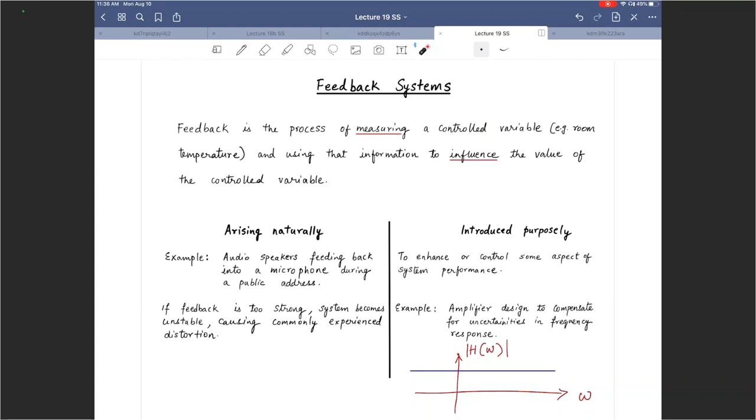Ideally you would want this to be flat, because you would want all frequencies to be amplified by the same gain. But if you do not have such a situation happening for some real amplifier, then you can use feedback to correct for those certain uncertainties.

For example, if instead of flat, it was doing something like this, you could use feedback to fix that - find out what frequencies are getting distorted and then adjust the gain, adjust the strength of those frequencies using that feedback information to bring it back up.

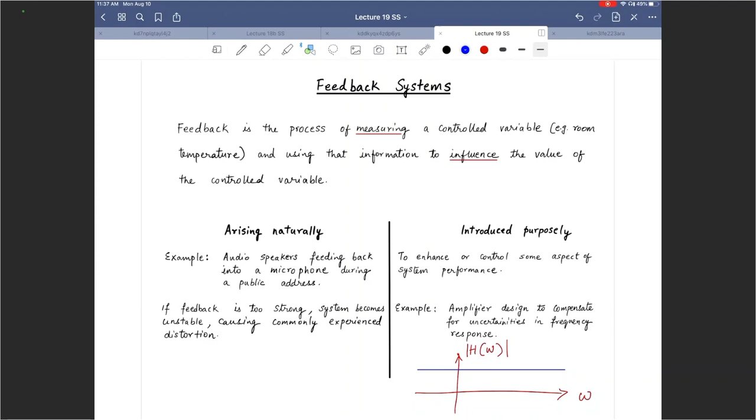We will take a look at that in just a bit, but I'm going to leave this as flat so that we see what I meant with that example - flat frequency response for the amplifier. That's what is desired in most applications of amplifiers.

Now, a little bit more discussion about feedback. Feedback is also commonly used in stabilizing unstable systems. So if a system is unstable, you can use feedback to get it closer to stable behavior.

An example is controlling the flight of a drone - if it is an unstable drone, you can use sensors to measure and influence the controlled variable. We are going to analyze one such system: an inverted pendulum that I'm very excited about.

The basic tool that we are going to use to analyze linear feedback systems is the Laplace transform for continuous time systems, and we use the Z transform for discrete time systems. So today what we are going to be doing is analyzing linear feedback systems using Laplace transform, and we'll be focusing on the inverted pendulum example.

For stability, the condition for continuous time systems is that all the system poles should be in the left half of the S-plane. If all the poles of your system are in the left half of the S-plane, then the system is stable. If any one of the poles is on the right half, it is going to be an unstable system. Even if they are on the imaginary axis, things are going to be a little bit risky. So the system is marginally stable if the poles are non-repeated complex conjugates on the imaginary axis. If they are repeated poles on the imaginary axis, that is unstable.

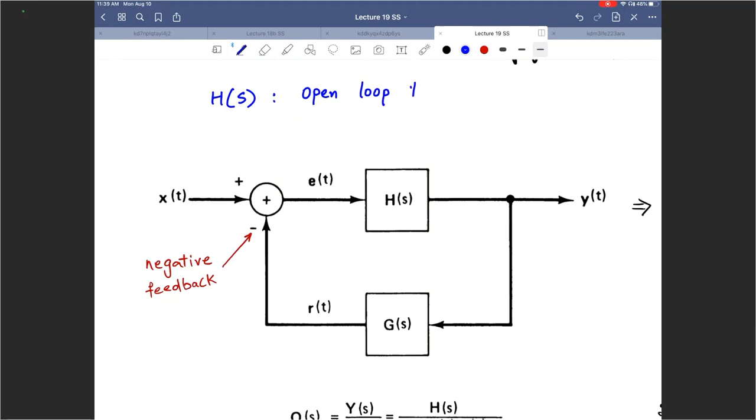Let's move on. How do you analyze a system? For example, we are going to start off with a feedback system like the one shown, with an input x of t coming in, going through h of s, the transfer function of the forward path. I'm going to call h of s my open loop transfer function, because if there was no feedback, it would be open loop, there's no closed loop. If I remove g of s, I have only this going straight through, so y of s divided by x of s would be h of s. That's your open loop transfer function, when there is no feedback.

However, if there is feedback, we call this feedback transfer function g of s. We measure y, feed it back through g of s as a negative feedback, or it could be positive - right now we are considering negative feedback. And then we subtract r of t from x of t to get e of t. And that goes again through h of s. So how do you analyze this system?

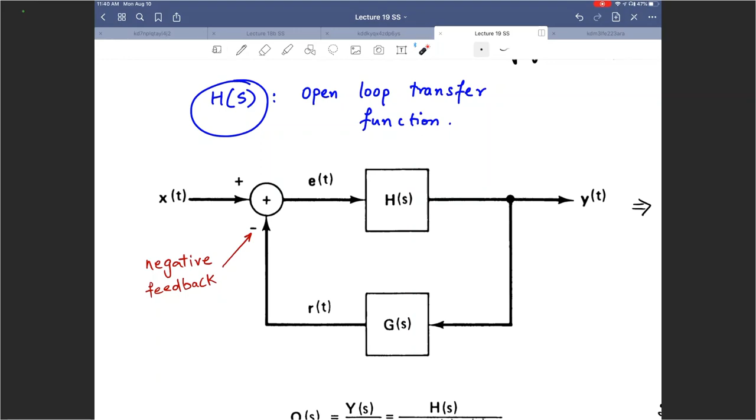First off, I'm going to write E as x minus r. This summer over here has negative feedback from r of t, so E, the error, can be written as x minus r. Take Laplace transform on both sides, you get E of s equals x of s minus r of s. That's equation number 1.

Next, we know that E is the input, goes through the transfer function h, you get y at the output, which means by just observing those three things, I can write output y of s equals E of s multiplied by h of s. In time, it would be a convolution between E of t and h of t; in Laplace, it would be a multiplication. So y of s equals E of s multiplied by h of s. That gives you equation 2.

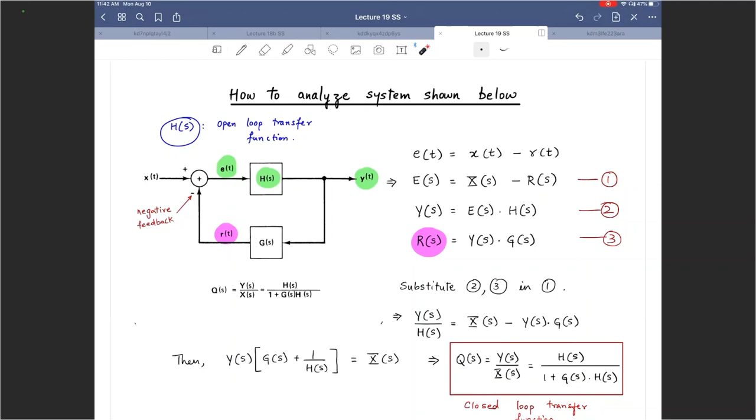Then R of s, the Laplace transform of r of t, can be written as the Laplace transform of y of t multiplied by g of s. Now we have got those three equations.

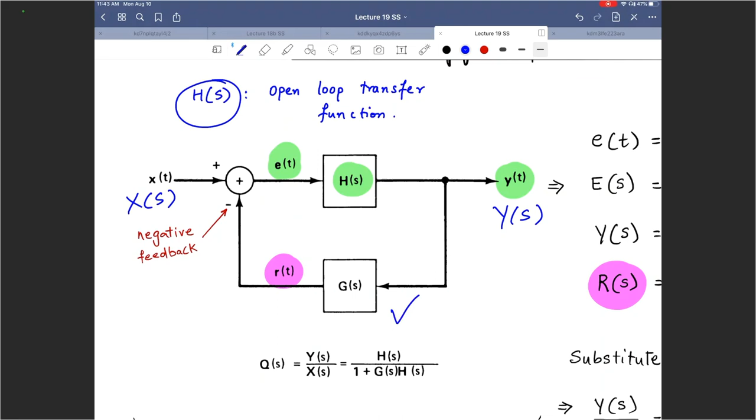From these three equations, we are going to substitute 2 and 3 in equation 1, and we are going to write y of s divided by h of s as x of s minus y of s multiplied by g of s. This is by simply manipulating the three equations. Now, if we rewrite this, what we are after is the closed loop transfer function, y of s divided by x of s with g of s present. It would come out to be: the closed loop transfer function q of s equals y of s divided by x of s, as h divided by 1 plus g times h.

H of s is the open loop transfer function, also called the system dynamics. G of s is the feedback dynamics. So this is system dynamics, and these are feedback dynamics.

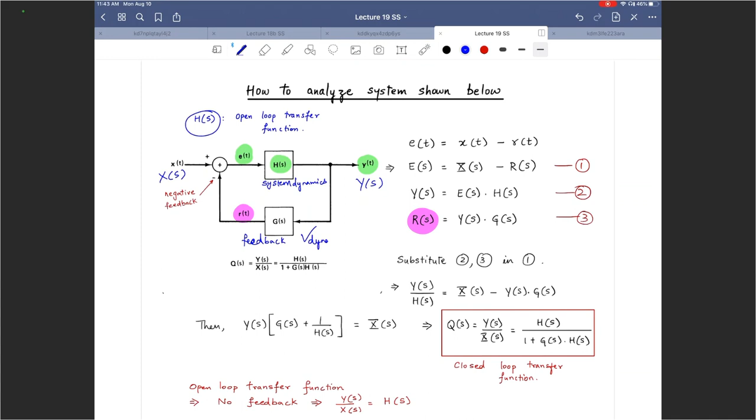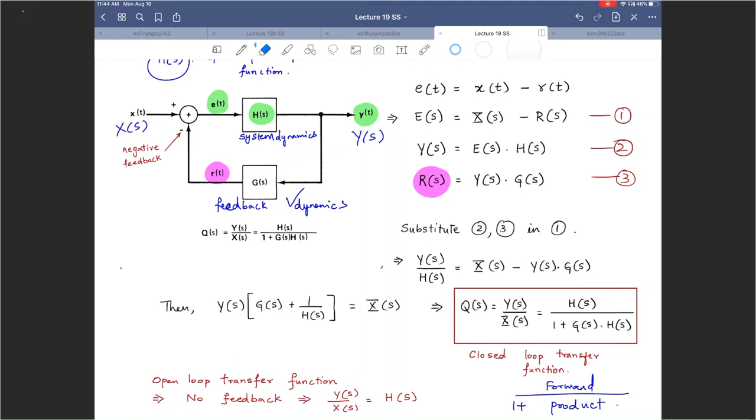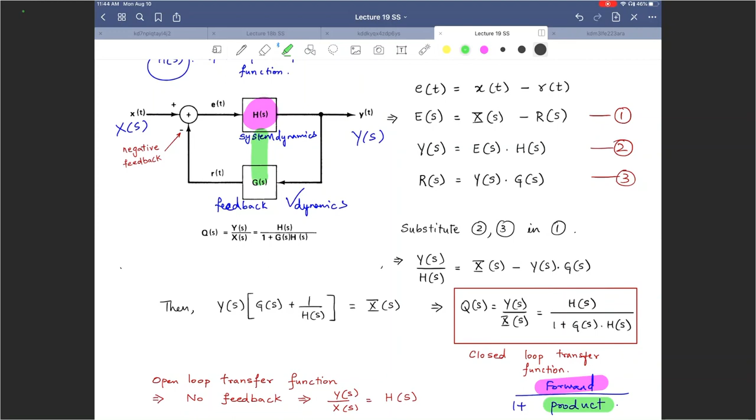There is a very easy way to figure this out. The trick is to think of this as forward divided by 1 plus product. I remember it this way - forward, you see this? Let me erase these. So forward divided by 1 plus product, where product is multiplication of these two. That's your closed loop transfer function.

Next, what is the open loop transfer function? It is simply h of s, which is y of s divided by x of s. So h of s is called the open loop transfer function, which is y divided by x when g of s is 0, when there is no feedback, when the loop is not closed, it is open - that means no feedback. So open loop transfer function is h, closed loop transfer function is h divided by 1 plus gh for this particular system. Questions here?

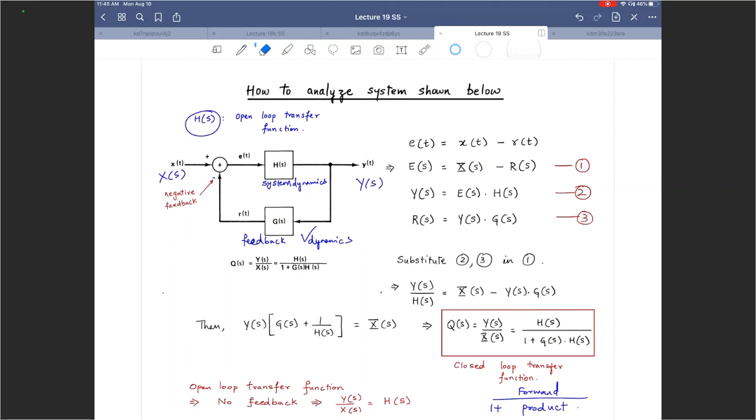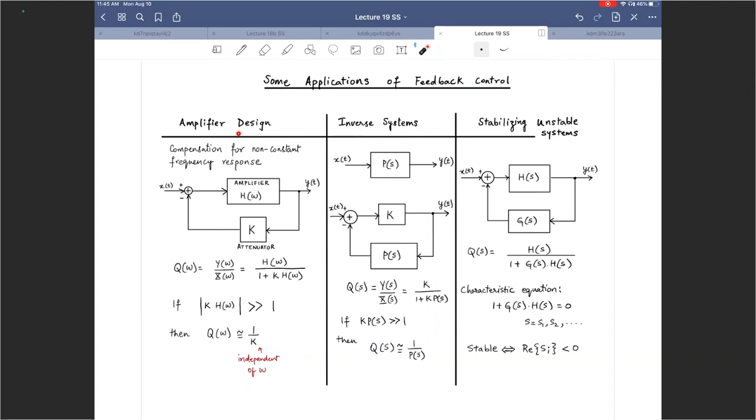Okay, now some applications of feedback control. I talked about amplifier design, how we wanted the frequency response of an amplifier to be independent of frequency, a flat frequency response, right? We can use feedback to get that done. How? Let's take a look.

Compensation for non-constant frequency response. If x of t is the input, y of t is the output, we have an amplifier with frequency response h of omega. I can use feedback through an attenuator of some attenuation constant k, provide that as a negative feedback, and the claim is that this will make the amplifier gain independent of frequency. Let us see that.

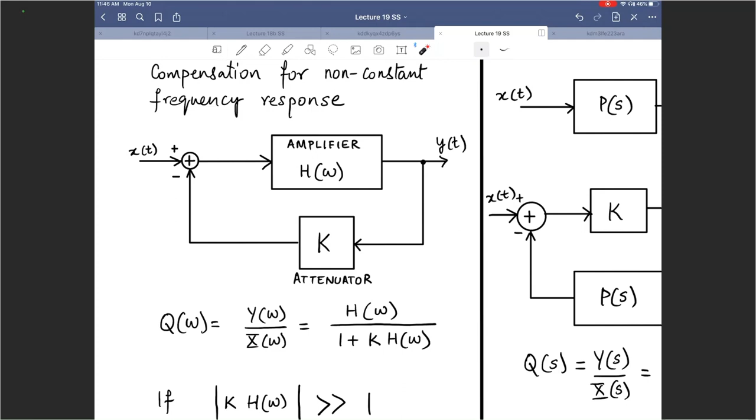Q, the closed loop transfer function of this amplifier, is going to be y of omega divided by x of omega, or forward divided by 1 plus product. Forward is h of omega, divided by 1 plus product, which is k times h of omega.

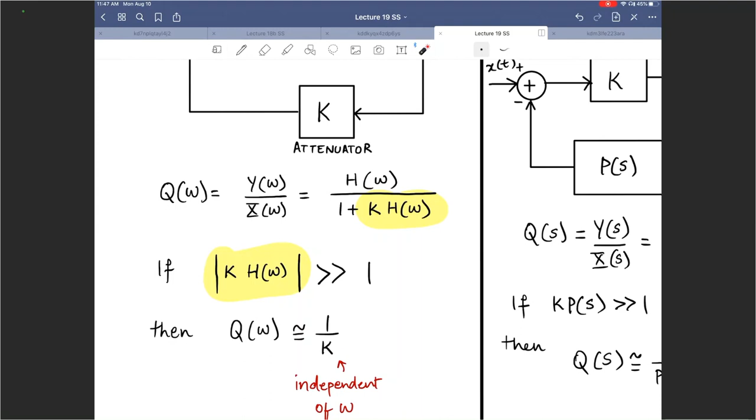Now, if I choose k times h of omega, this guy right here, to dominate, much greater than 1, then what would happen is Q will become simply 1 divided by k. Because if this dominates, I can ignore the 1, h of omega gets cancelled out and you get 1 over k. 1 over k is independent of omega, which means my closed loop transfer function became independent of frequency, which means it became flat, because k is a constant, that's the amount of attenuation. So that's how you can use negative feedback to get a constant frequency response for an amplifier.

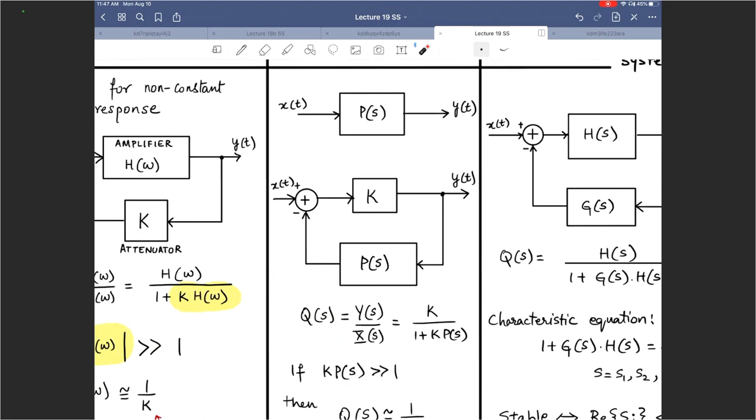Second application here is for an inverse system, which means, can I use feedback to get the response of 1 over whatever the system response is? So for example, if you start off with the original system, which is x going into p of s, you get output y of t. Can you design a system that does the inverse of this, 1 divided by p?

We can do that by connecting a negative feedback through p of s in this particular configuration: x of t, negative feedback, you have a constant multiplier k, that's your y of t. You're taking y of t and feeding it back through p of s to get that negative feedback amount. For this, what would be the closed loop transfer function? It would be forward k divided by 1 plus product, 1 plus k times p of s.

And if I choose k times p of s to be the dominant factor in the denominator, that means k times p of s is much greater than 1. In that case, k would get cancelled out and you would get approximately Q of s is 1 over p of s. That is how you would design an inverse system.

Now the last column here is actually what we are really trying to understand. Can I use negative feedback to stabilize an unstable system? Some of these things are in time, some of these things are in s, so some of them are in the Laplace domain. You have h of s, the transfer function of the open loop transfer function, g of s is the feedback dynamics, and we earlier derived that the closed loop transfer function Q of s is h divided by 1 plus g times h. So for the closed loop transfer function, what is the characteristic equation?

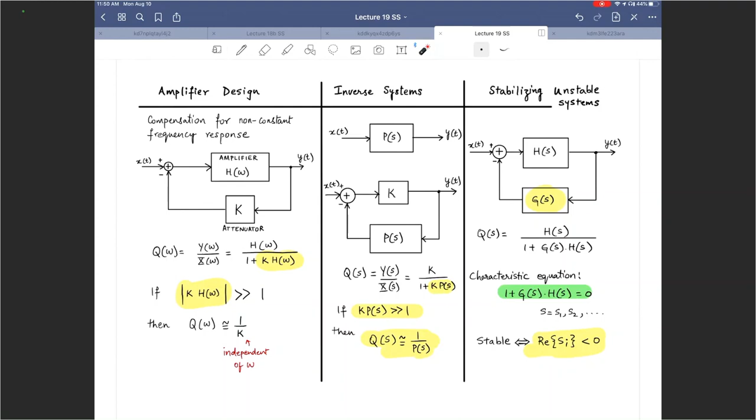And this leads us to our real world example that I want to focus on: the inverted pendulum. Now, while we are talking about the inverted pendulum, I hope that you guys are trying to balance a pen or a pencil on the palm of your hand. When you try to balance a pencil or a pen on the palm of your hand, what is going to happen? Well, of course, if you don't do anything, if you just place it vertically, it would topple over, right? So that means that to begin with, this system of the inverted pendulum is going to be unstable.

So what do you need to do in order to balance that pencil on the palm of your hand? Well, you would have to move the hand itself, right? So in real time, you would have to measure how the pencil or pen is toppling over, and you would have to move your hand in such a way that you do not let that inverted pendulum topple over.

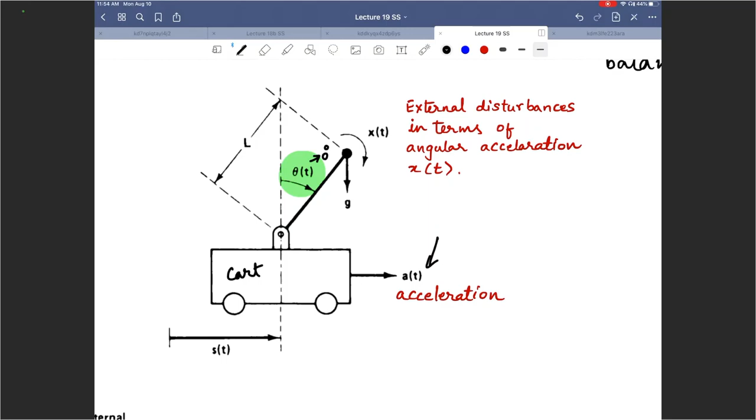Now by itself, the inverted pendulum is going to be unstable, clearly, right? So if we are not moving the cart, and if we just leave the inverted pendulum upright, it is going to topple over. Even the slightest bit of movement will topple it over. A lot of things have to be perfect in order for it to continue staying upright. Not practical, not stable by any means.

So we can apply an external acceleration a of t to keep it balanced. So the goal is going to be this: even if you have external disturbances, somebody pushing it over, some wind, or something or the other that makes it topple over, we are going to measure theta of t. That is our measurement of the control variable, and then we are going to use that measurement value to change the acceleration of the cart such that theta of t goes to 0. That's going to be our goal.

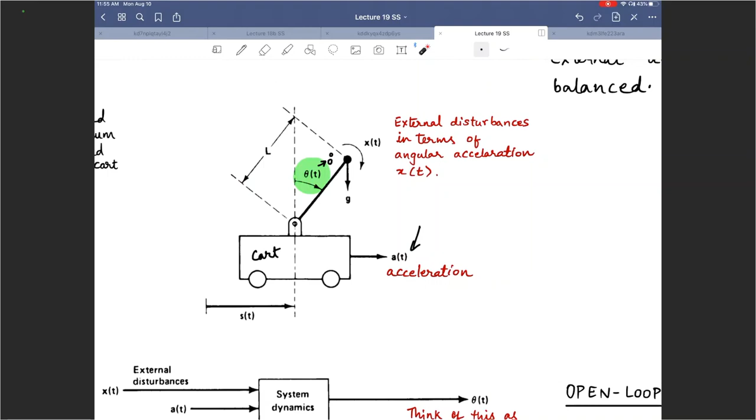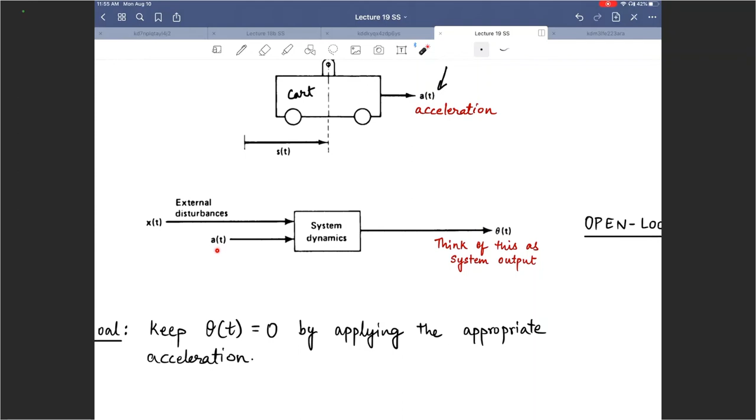So having talked about that, let's take a look at these two things here. Our x of t is the external disturbance. This is somebody pushing on top of the pendulum to make it topple over. A of t is the acceleration of the cart.

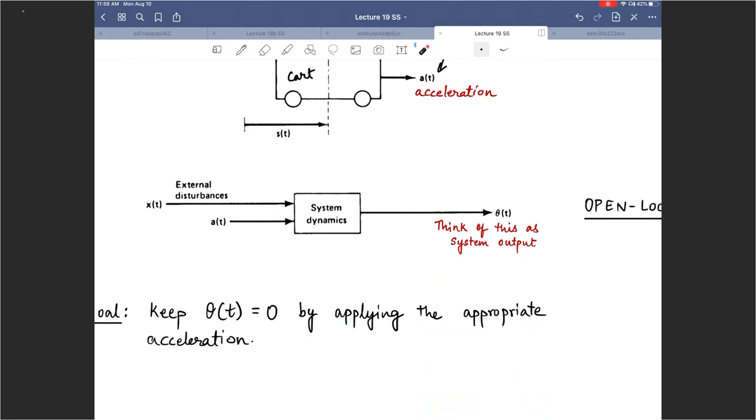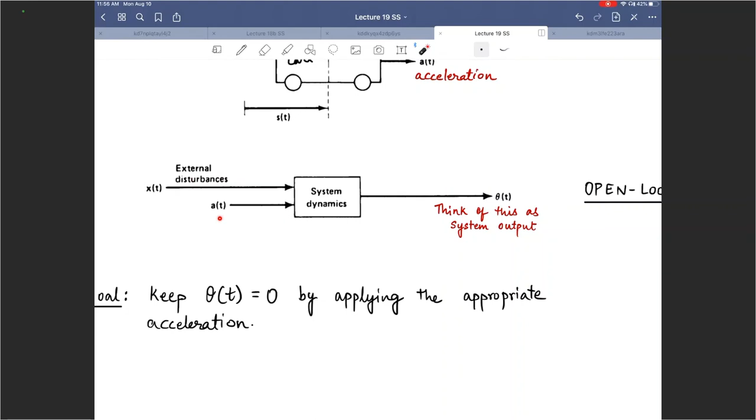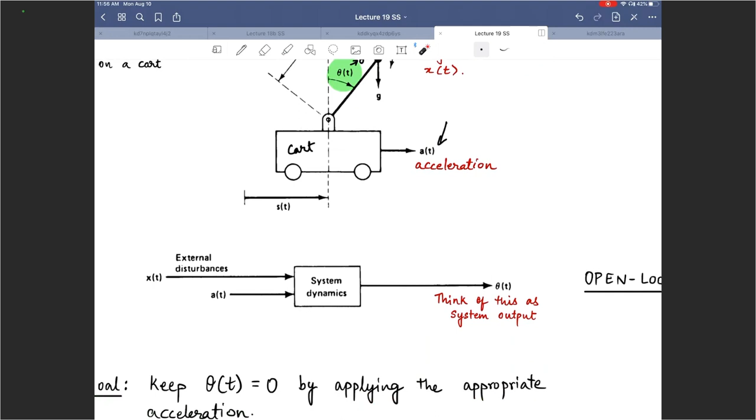That is essentially the feedback information, and the feedback information should be derived using theta of t, our angle with respect to the vertical. And theta of t is the actual output, and we want this output, system output, to be 0. So you have external disturbances, and A of t is the feedback going through the system dynamics, which involves the cart, the pendulum, the length of the pendulum, and all that. Those are all system dynamics, how all the connections are being made. And then the output is essentially a time dependent angle of the pendulum with respect to the vertical axis.

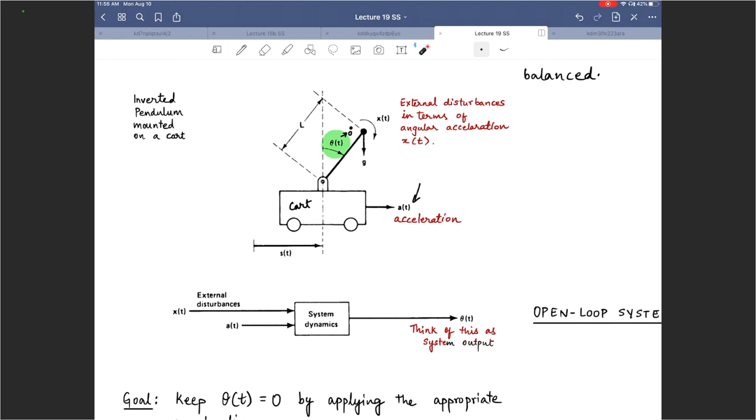So open loop system is of course unstable, and this is an open loop system. You notice there is no feedback here. If there is no feedback, then there is an open loop system. There's no loop. And if there is no loop, that essentially means that we are not accelerating the cart using the information of theta of t.

We are just arbitrarily changing the acceleration. We may be not changing the acceleration at all, or we might be accelerating it by some constant. But if a of t is not being derived from theta of t, then this is an open loop system, and it's going to be, of course, unstable. The pendulum is not going to be upright.

Our goal should be to keep theta of t 0. That angle should be 0. And we can do this by applying the appropriate acceleration. So this acceleration cannot be an arbitrary quantity. It has to be an appropriate acceleration, which means measure theta of t, use that through some feedback dynamics, and then adjust your acceleration. Only then your goal can be met to make theta of t going to 0.

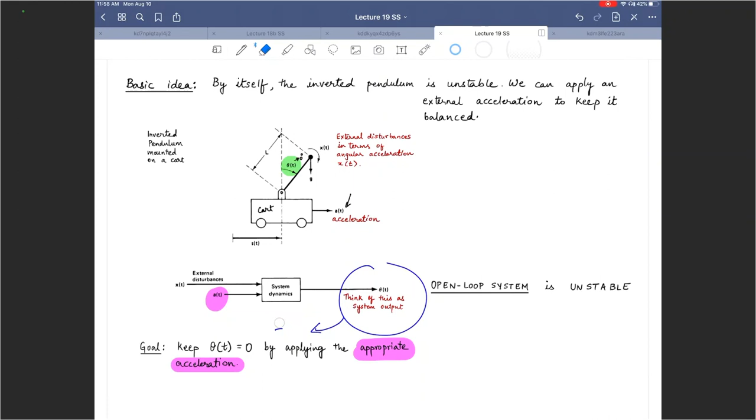Now the main question is, what should I put in this feedback dynamics so that theta of t can be 0 and we have a stable inverted pendulum? That's our main problem today. All right, let me erase this. All right, let's continue.

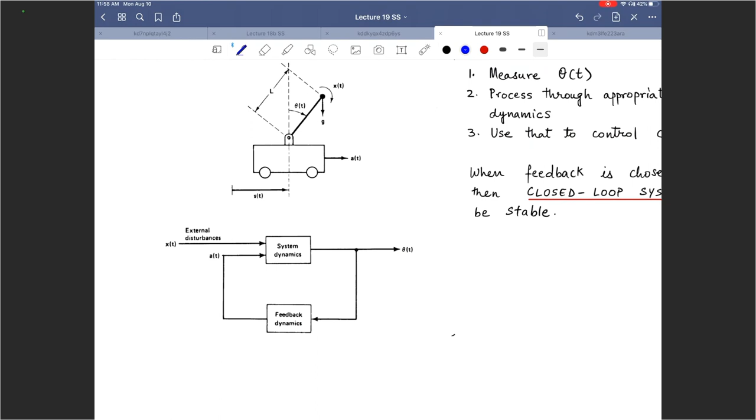So we measure theta of t and use appropriate feedback dynamics to adjust the acceleration of the cart such that the system becomes stable, which means theta of t goes to 0 degrees, right? That's our goal. So first, measure theta of t, process it through the appropriate feedback dynamics, use that to control the acceleration of the cart.

And when the feedback is chosen correctly, and what is correct and what is not correct is the main question here, the closed loop system can be stable. We still have to figure out a lot of details about this, but there is a way to do this.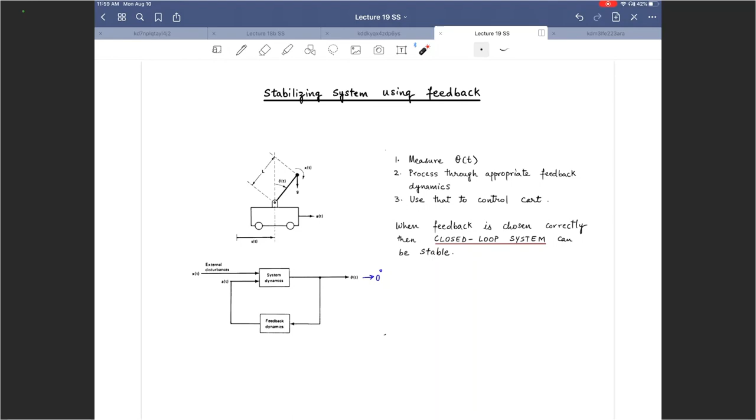Now, some of the initial discussion is going to be through some engineering analysis, right? Like trying to balance out the accelerations. The acceleration due to the disturbance, the acceleration due to gravity, all of those.

If you take the system itself and you write the equation to balance out the accelerations for that inverted pendulum, then you get this: L, which is the length of the pendulum, multiplied by the second derivative of theta of t, which is the output, equals g, which is the acceleration due to gravity, times sine of theta of t, plus length of the pendulum multiplied by the external disturbance x of t, minus a of t, times cosine theta of t. That is an equation that balances out the accelerations for that pendulum.

Now, remember we said we are going to focus on linear feedback systems. So we are going to try to linearize this equation. It is not linear right now. So how can you make it linear? Well, this sine term needs to become linear. That cosine term also needs to become linear.

So for that, what we are going to do is assume that theta of t is small, that deviation away from the vertical is pretty small. When the angle is pretty small, then the sine of the angle will be linear. So sine x will be equal to x if x is small, right? So sine theta should approximate to theta of t for small theta of t. And cosine should be approximated to 1 for small angles theta of t.

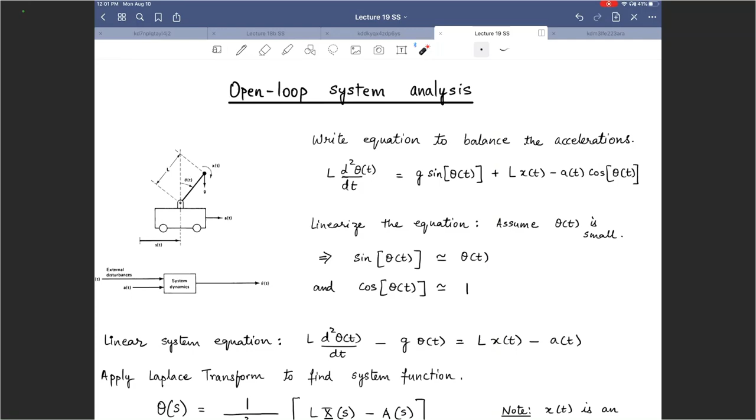So as long as it is linear, I can make that substitution in my original equation here that I obtained when you balance out the accelerations. The linear system equation will now become this, just by substituting these guys in the original equation.

Now you apply the Laplace transform to find the system function. When you apply Laplace transform to this differential equation, theta of s, the Laplace transform of the output, can be written into this form. There are two products here.

One is the open loop system function, which means only the system dynamics at play, which is 1 divided by L S squared minus G. And the other is the Laplace transform of combined inputs.

So one is open loop, which means no feedback. So no feedback means what? This term is not there, right? All the others are there. That would give you the open loop system function. And the other one is the Laplace transform of combined inputs.

So this equation, theta of S, is being derived by taking the Laplace transform of the linear system equation. In this, we are assuming zero state here. At the beginning we have zero state.

So once I write theta of S, our output in the Laplace domain, as this function, I can use this to find where are the poles and try to note stability from that. Also note that x of t is an input, the external disturbance that we have no control over. So we are not controlling x of t, that's an external disturbance. The only thing that we can control is the acceleration of the cart, a of t.

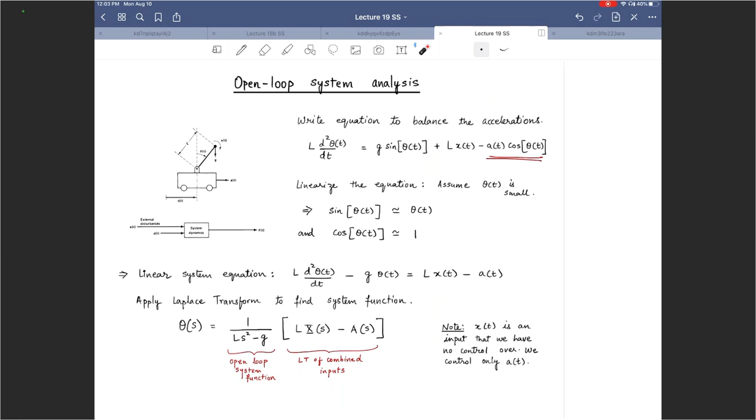Where are the open loop poles? If the system does not have any feedback, you have to deal with the open loop transfer function. Where are the pole locations for that? Theta of S is written as 1 divided by Ls squared minus G, multiplied by the Laplace transform of the combined inputs, Lx minus A.

I can write this as some open loop transfer function H multiplied by the Laplace transform of combined inputs. That gives me H of S, the open loop transfer function. The denominator of that is simply Ls squared minus G. Equate that to 0 and you find two values of S.

Where are those two values of S? One is on the right half plane on the real axis, and one is on the left half plane on the real axis. The one on the left is a stable pole, that's good, but the one on the right is absolutely unstable, which makes the overall system unstable.

This is essentially how you can say that if you do not have any feedback, the inverted pendulum is going to topple over - it is not going to be stable. No feedback means unstable, because the open loop poles are unstable - one stable, one unstable - which means the overall system is unstable. So open loop poles tell us whether the system is stable or not when there is no feedback involved.

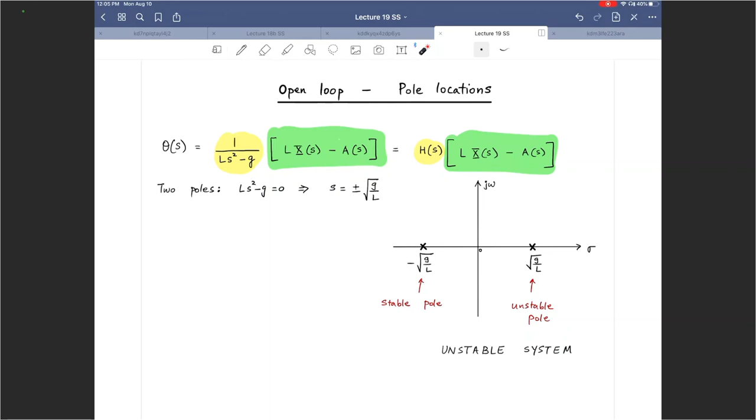Now we are coming to the interesting part of this lecture, the real core of it. If x of t is the input, multiplied by some scalar value L, essentially the length of the pendulum, going through the open loop transfer function h of s, which we derived earlier as 1 divided by Ls squared minus G, the output is theta of t. I measure theta and use that through some feedback dynamics G of S to get my acceleration, which is the feedback. So the goal is, if you have a closed loop system as shown, can you choose G of S to make the overall system stable?

So choosing G of S is the remaining question. Using the earlier result, what is our closed loop transfer function? Theta of S divided by x of S - that's our closed loop transfer function.

We are essentially writing this as theta here, x here, but it is still forward divided by 1 plus product. Forward is this multiplied by that. 1 plus product is product - product is G multiplied by H. That's an earlier result, so we have the closed loop transfer function now.

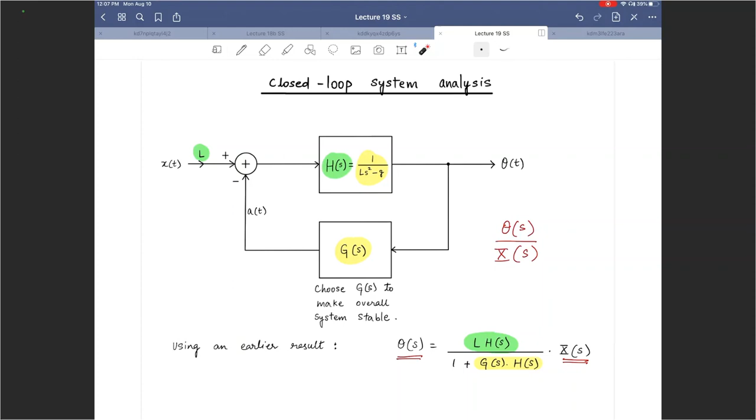That means I can find out where the closed loop poles lie. But right now I just have g of s.

The first g of s I'm going to consider is a very, very simple one: proportional feedback, which means accelerate the cart proportional to the angle. So if theta of t is high, accelerate the cart faster; if theta of t is low, acceleration is low.

So proportional feedback essentially means g of s is k1, some constant. Theta of t goes in, gets multiplied by k1, and your acceleration is now k1 multiplied by theta of t. If that is the case, your closed loop transfer function becomes this, and you will have two pole locations in this case.

One is at plus square root of g minus k1 divided by L, and the other is at minus square root of g minus k1 divided by L. Clearly, they are two separate poles.

If you think about k1 equals 0, one pole is going to be on the right half, one is on the left half of the plane. But because k1 influences the location of the poles, we can try to figure out whether we can make this system stable somehow. So what we are going to do is sketch out these two poles, and see how these poles move as you change k1.

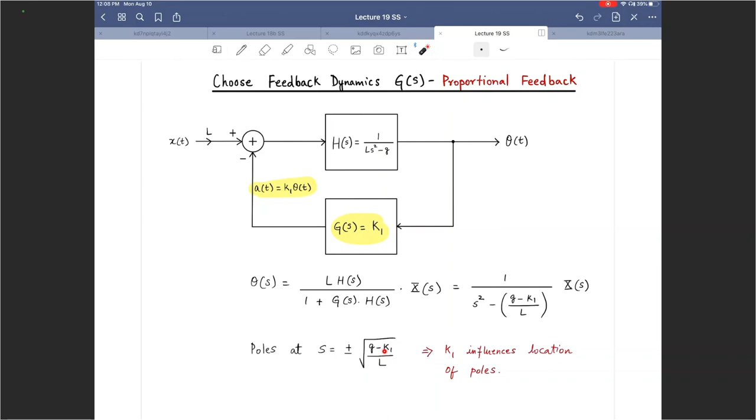That gives us this - the root locus. The root locus is a sketch that shows us how the poles move in the S-plane. That's it, it's a sketch.

So where do we start? Let us start with k1 equals 0. If k1 equals 0, then the two poles are actually the open loop poles, because you see this g minus k1 divided by L - if you make k1 0, you have plus or minus square root of g divided by L. Those are the two poles, the same as the open loop poles we saw earlier. This guy is stable, but this guy is unstable. So when k1 is 0, we have an unstable system.

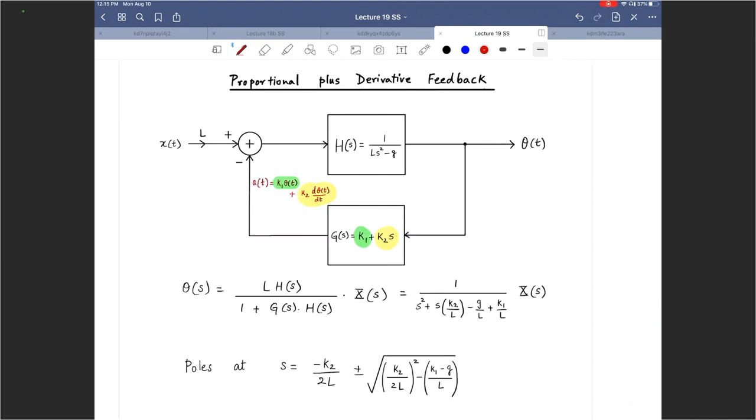Put them onto the S-plane. You'll see that when k1 equals 0, the starting pole locations are at k1 equals 0 and k2 greater than 0. When k1 equals 0, you start here and here, with k2 greater than 0. You see what happens: when k2 is greater than 0, this pole moves left somewhere here, this pole moves left somewhere here. So we have first made k2 greater than 0, initially moving both poles to the left, and then played with k1. So this moved here, this moved here, both moved left. That's your initial starting point.

Then you increase k1. Now when you increase k1 greater than 0, what happens? This pole is now able to cross over to the left half plane, becoming stable. This pole is also already stable. They are going to come together, break away, and travel: one pole goes up and one pole goes down.

Now, as long as they are in the left half plane, they are going to be stable. What is happening to the system behavior if the poles are here and here? Let me draw in blue.

If the poles of the system are where it is blue, as it's going up and down, is there damping there? So you see there is damping there, right? So zeta is between 0 and 1 there. Over here on the real axis, zeta could be 1 or greater than 1. So as you change the damping factor, you could have oscillations or you could not have oscillations in your system output.

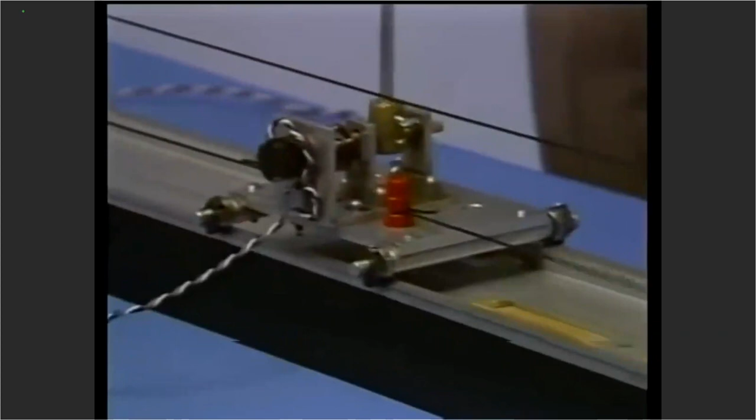So that's an assumption that we have to make. As long as theta of t is small, the system is linear and everything works out. So as you can see, the cart is able to keep the pendulum upright.

Things are moving fine. Now, in order to make things a little bit more fun, he is going to place a glass on top of the inverted pendulum. So essentially he's playing around with the x of t, the external disturbance. So when he does that, the system is still able to maintain it stable and it's not toppling over. So even if he changed x of t, it was still stable and things are fine.

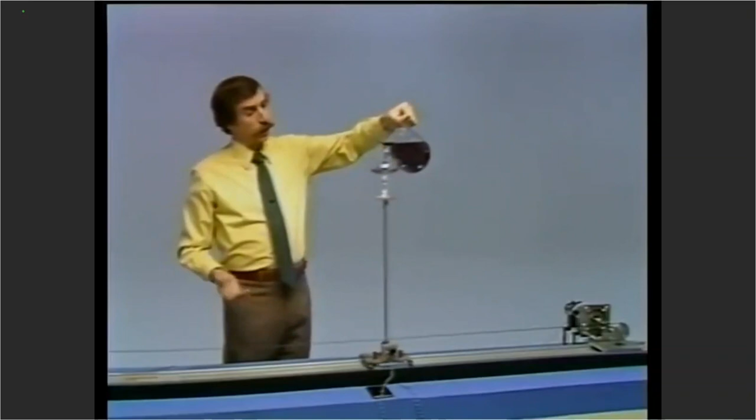In fact, to make it even more dramatic, he pours a liquid in the glass, still stable. And you see now, take a moment here. The liquid in the glass is not sloshing, which means it's an overdamped case. The poles are still on the real axis. There's no oscillatory behavior. A good amount of damping is there.

Right, the system is pretty stable now. The liquid I can see is not sloshing around. It's pretty stable. There are some oscillations, but they come back down again.

And I'll go a step further from here. He will in fact remove the glass and then place the entire pitcher full of water on top of the inverted pendulum. And when he does that, the system is still able to balance this out. However, you see what starts happening is the liquid inside that starts giving oscillations into the system.

So the liquid is sloshing around, which means that now zeta is between 0 and 1, there are oscillations. So to increase damping, he actually puts back that water that he had grabbed earlier on, increasing the damping factor, no oscillations, back to system stability.